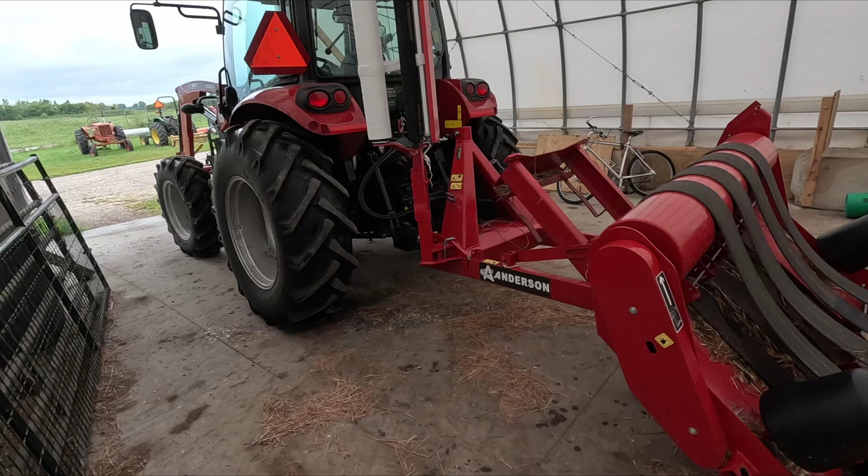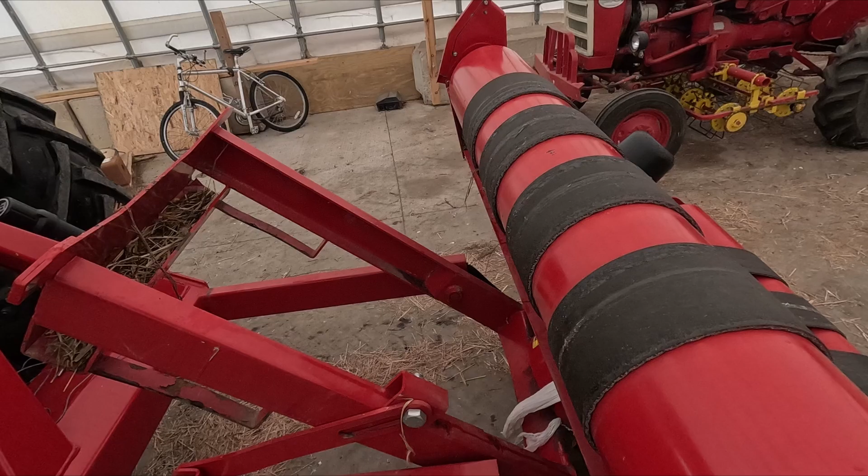For those of you who haven't seen one of these working like this before, this would be the dump position. You lift up on the 3-point and this frame lifts up, and on this pivot point here, the deck flops back and your finished bale rolls off.

Basically, the fundamental idea of turning this into an automated system is to alleviate the need for a big enough tractor. For example, sitting out there is a John Deere 5210. It's a great little tractor, and it runs the wrapper perfect. But that machine doesn't have four-wheel drive, doesn't have a loader, doesn't have front weights.

When you pick this up, this whole contraption weighs 1,300 pounds. It picks up the front tires of the tractor, and just driving around here on the farm, it's not too bad. You can steer with your brakes if the wheels are starting to fully come off, but you definitely couldn't go down the road with it like that.

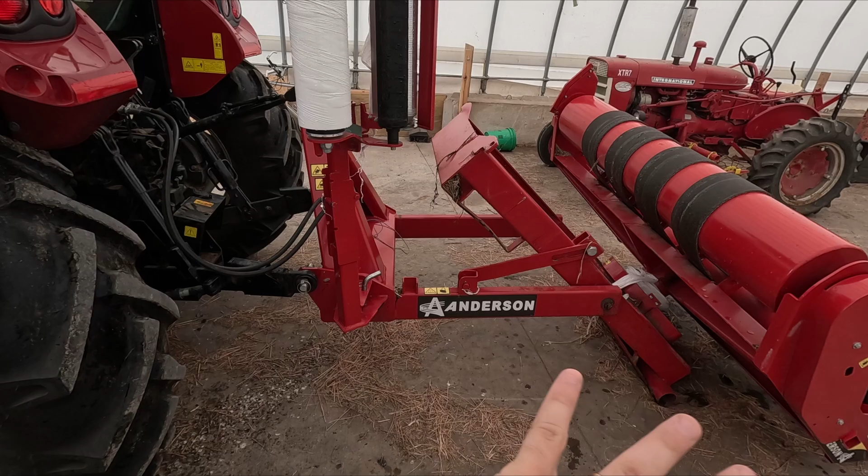By converting this into an automated system and having some sort of stand or trailer underneath of it, the idea is then that any tractor could pull it. This little 140 could pull it, the skid steer could pull it out to where it needs to be, you could pull it behind a pickup truck, doesn't matter.

It'll have its own power plant, its own gas engine running a hydraulic pump that'll run all the functions of it. So it doesn't need to be connected to anything else, just needs fuel stuck in the gas tank.

I've been sort of torn between the idea of doing a fixed stand where you would still pick it up and move it with the 3-point.

Generally what's going to happen, I'm making some assumptions here, but generally what would happen is I would finish baling, come back to the farm, drop off the baler, grab the wrapper here, hook it onto the tractor, put the bale grapples on, grab a bunch of plastic like you see sitting there, and go out to the field and wrap.

Or we would maybe haul hay back, and it would just be sitting stationary here at the farm, and as I was unloading the wagons, I'd be running it through the wrapper and stacking it.

But the thought that I had with the stand is that I always still need this tractor to move it around. What if I've got a neighbor that just put up some hay and wants to rent the wrapper for the day or the afternoon or whatever? I still have to take the whole tractor over there just to drop it off, because maybe they've got their own setup and they don't need the tractor.

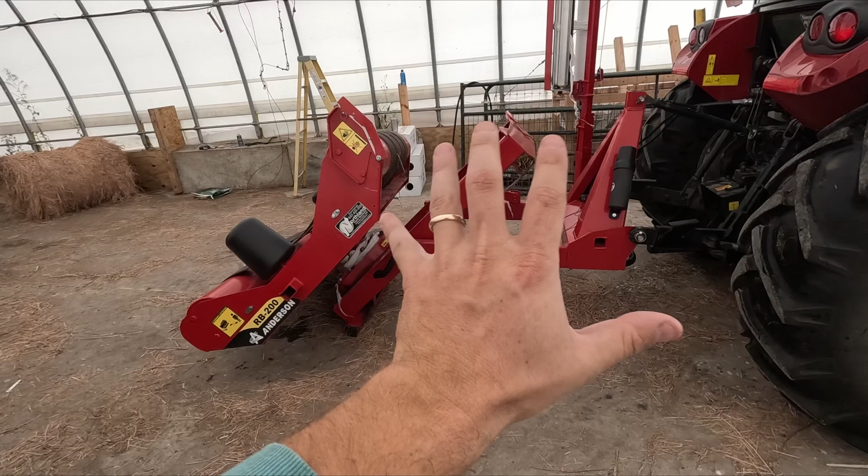So there's potentially a big time saving factor by having this as a trailer and not as a stand.

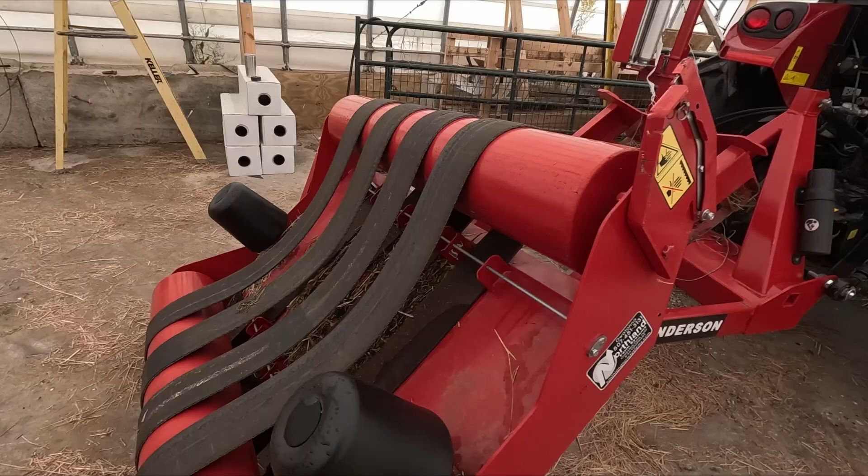Funny enough, I was actually planning to turn this into a trailer like 2 years ago, just so we could run it behind that John Deere that's sitting out there. So I had kind of collected some of the basic pieces that I needed to do it.

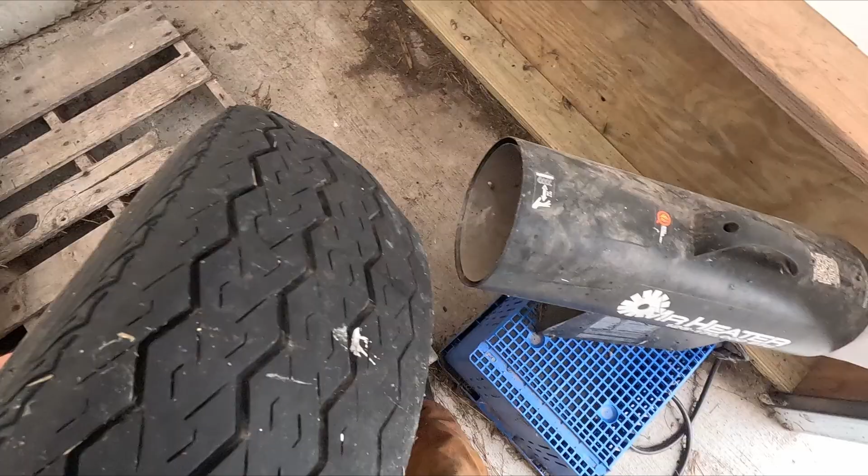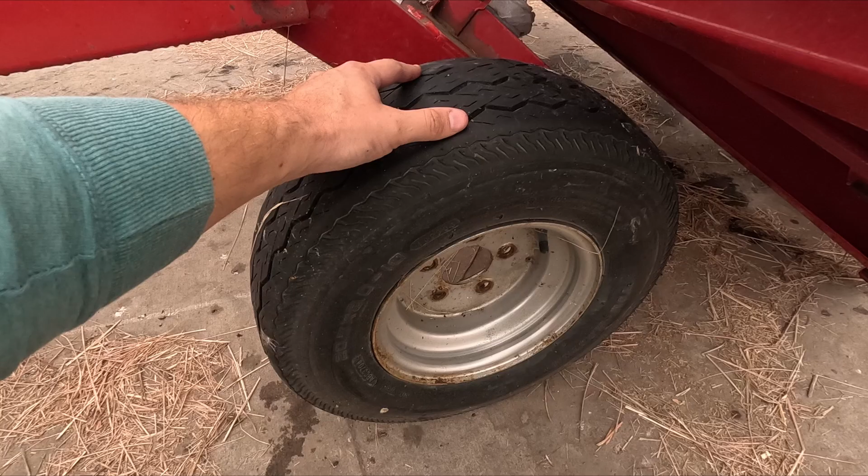I grabbed the tire here. What I found was a set of these old tires, the other one's in my pickup. And these I bought, they're not particularly good tires, but the idea was that these are a pretty good size, and they got the right weight rating for moving, if this was trailerized, moving this contraption.

So what I have in mind here is that there'd be a tire on either side, sitting just about there.

So far enough out that it clears the drop portion of the deck, far enough forward that it clears the deck there, but far enough back that when the safety lock is engaged and there's going to be a hydraulic cylinder to control the tilt deck, when that's sucked in all the way, that this is far enough back that it doesn't still want to tip backwards.

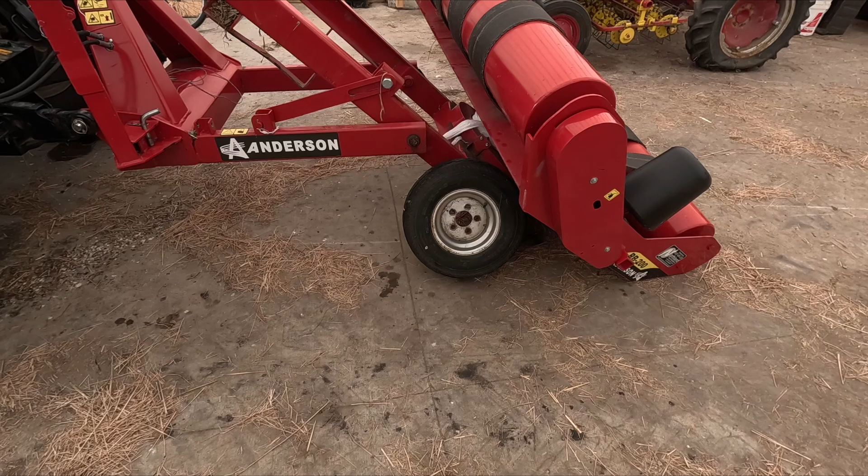We're pretty close to that edge. I don't have a great way of testing the balance, the tipping point of all of this. I kind of have to just build it and find out. But I'm reasonably confident that that location for that tire will work.

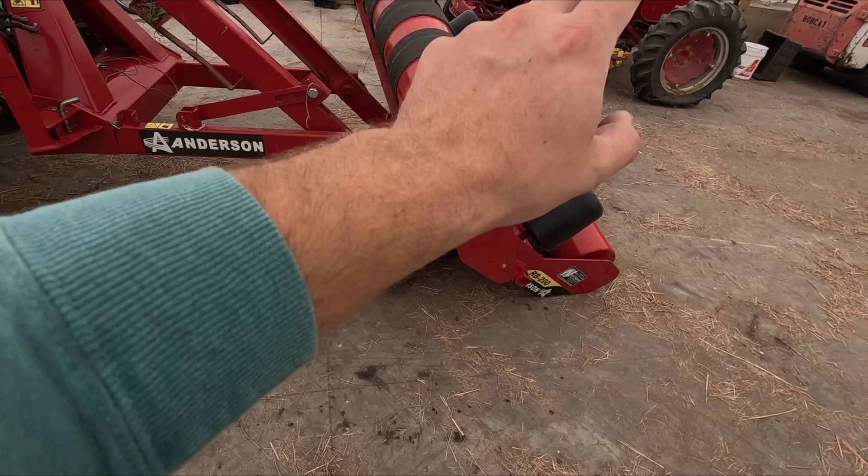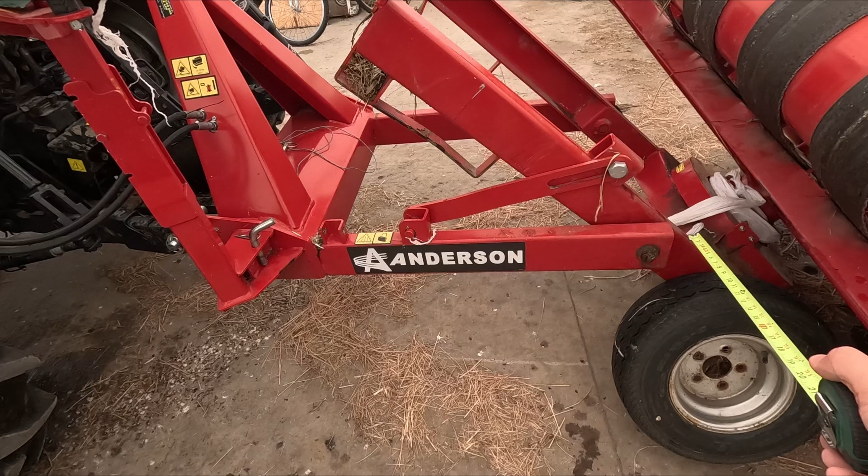I might go grab the stand so I can jack this up to double check all the geometry, but that's the general principle. The thing we have to figure out now is how much steel we need to connect this. So underneath of this is a 2x4 square tube. We're gonna go with a 2x3 by 1/4 inch wall subframe.

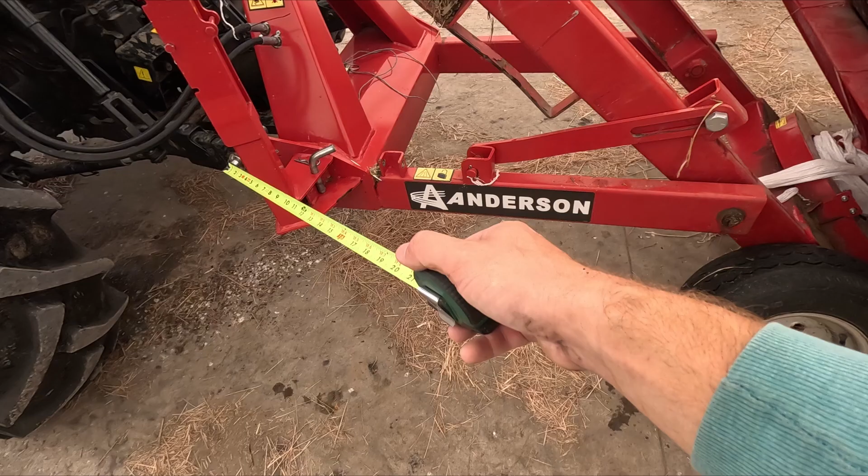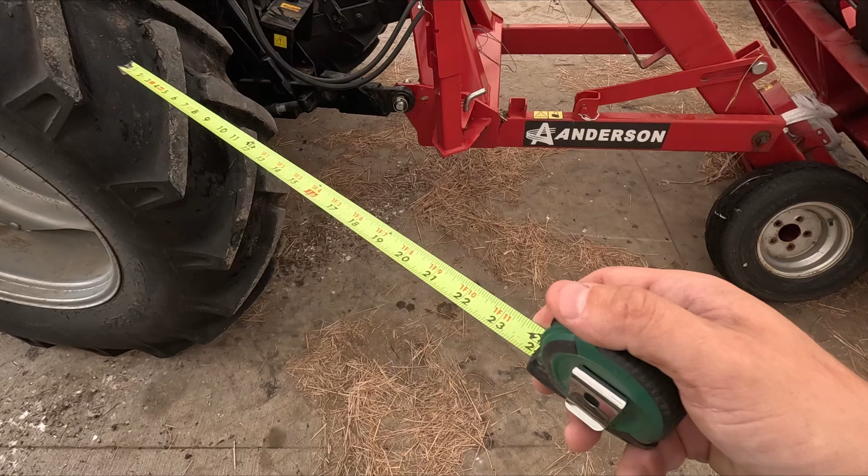It's gonna sit directly underneath of this, running up forward, coming forward a certain amount, enough room for the power unit and everything to sit right here, and then continue forward to a tongue for connecting to the trailer, or connecting to a tractor, a pickup, or whatever.

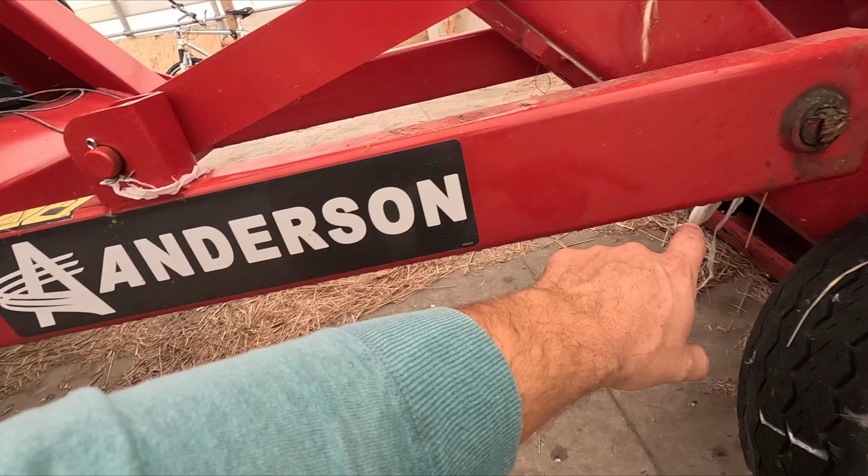So there'll be at least one cross brace that's going to be underneath. It can't be, well, it'll run, if the square tube is sitting right here, it'll run straight across there or somewhere back here maybe. I don't know exactly where. Those are just going to be scrap pieces. Those won't be the same 2x3 because they don't need to be. They're just tying everything together so it can't walk around out the back.

This will be a 2x3 piece with a hole drilled in it big enough for the axle stub. I just bought these generic spindles that'll slide through and they'll get welded in, and then the hub face will mount the tire right about there.

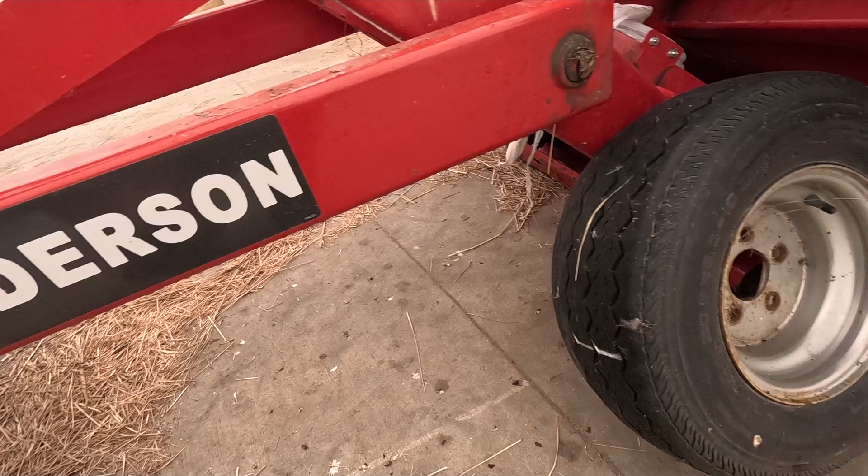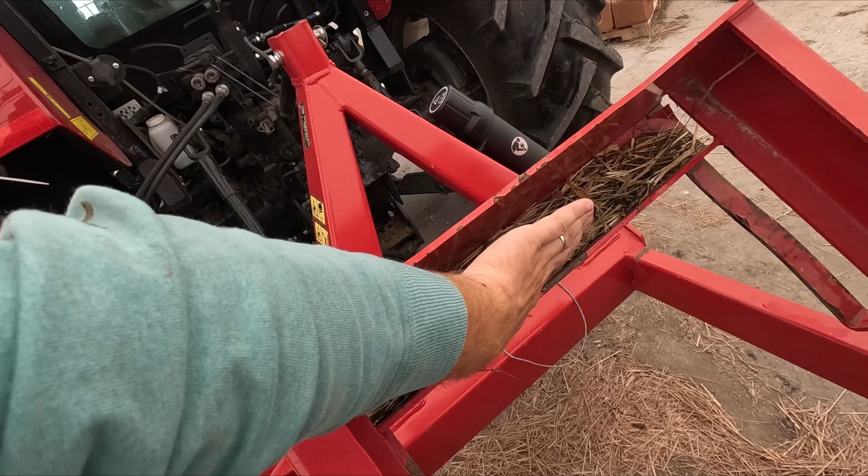Yeah, I'm trying to think of what else goes into this. There is the hydraulic assembly that's going to have to get added to this. The way that that's going to work, I've already figured out, is there's going to be a plate that sits right here, and it's going to be through bolted to this.

And a big important part of this process for me is that I want to be able to turn this thing back into a 3-point wrapper at any point, super easily. My big thing is if we upgrade wrappers at some point, if I can't sell this as an automated system, I just want to be able to revert it back to an Anderson RB200 and go trade it off to the dealer.

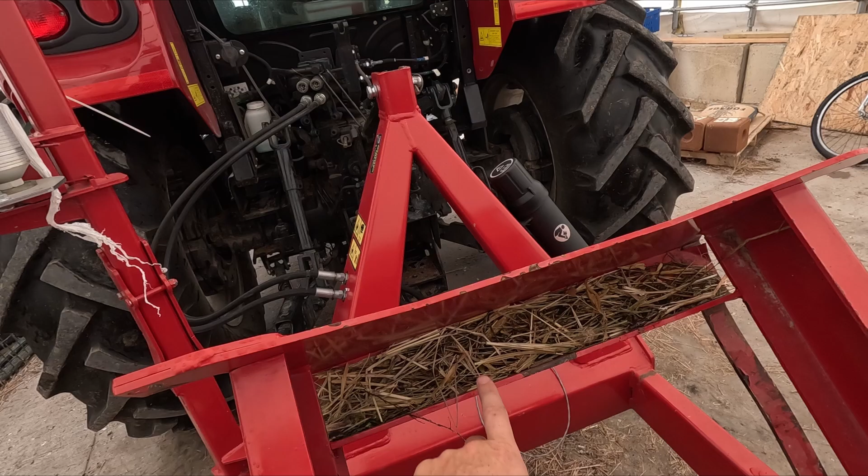So a lot of the modifications, I want to minimize how much welding I have to do on the physical machine. So these ones are going to be through holes, and then there's going to be a tab, 2 tabs that come out where a pin will slide through and the hydraulic cylinder will grab onto that.

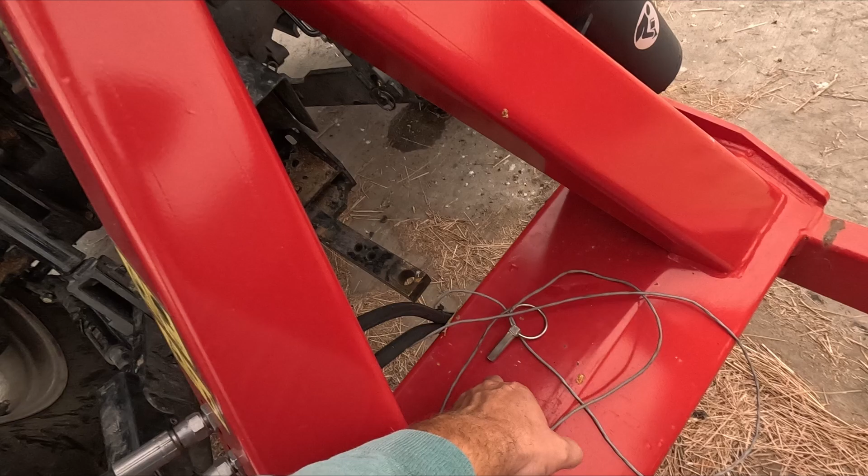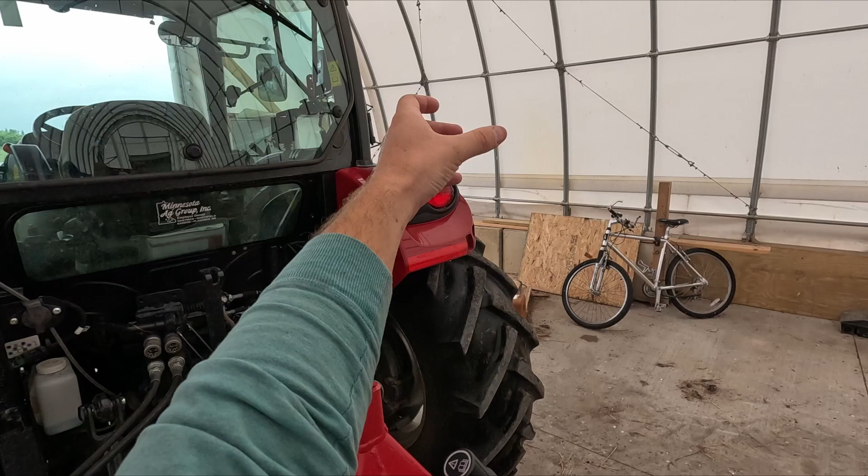On this side, this is a little bit harder. I think this may end up getting welded on a plate with actually a 2-inch receiver for making your own hitch in a pickup truck. That would then just have a pin that goes through it and a big 2-inch stock piece that's going to come up and out, and at the top of that another 2 tabs that the top of the hydraulic cylinder will connect to back down to here.

So you could still run it just with the tractor and use the tractor hydraulics to cycle it, or you could just pop that cylinder off, use it as a regular 3-point wrapper. But when it's in its trailer configuration, then yeah, you'd have a power plant with it.

I'll be able to test all of the trailer function and the dump function just using the tractor hydraulics before I have to build the power plant unit to run all of this. So the things I'm going to figure out right now so that I can go back and start plugging some of this into SketchUp and figure out exactly how much steel I need is I need to know the length of the frame here, which I'm actually going to measure on the...

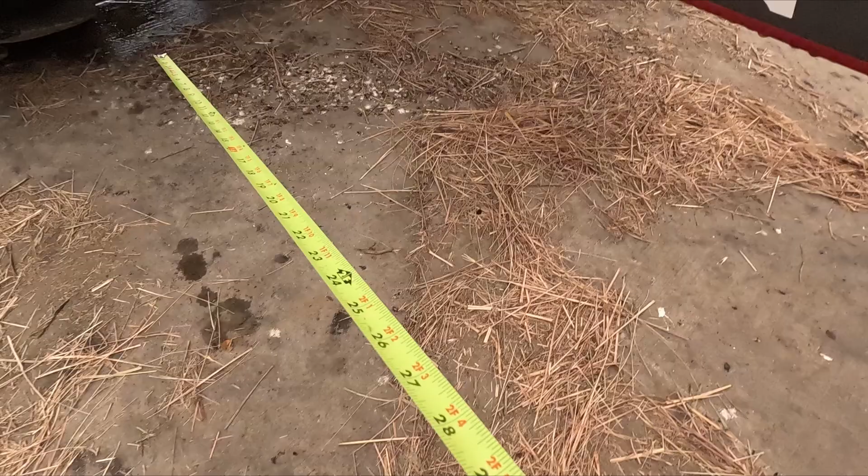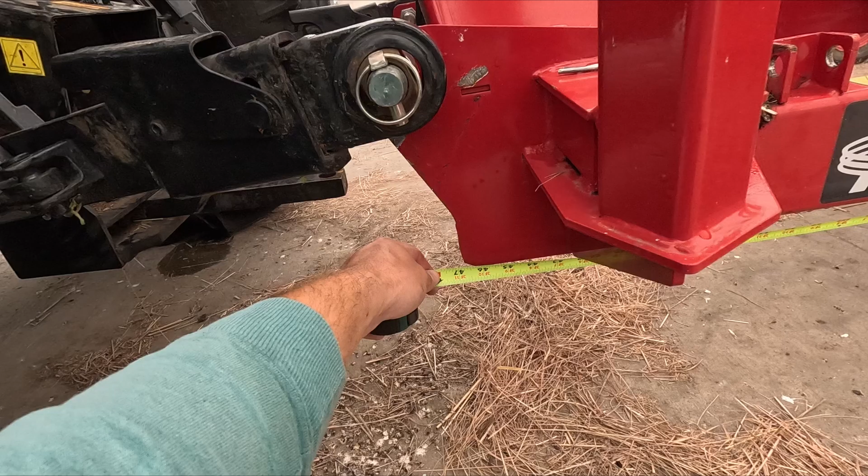No, measure on this side, but switch hands. I'm going to grab from the back of that to the front of the frame here, which is 47 inches just about. If we come all the way forward, the center line of that pin looks to be just about 4 foot.

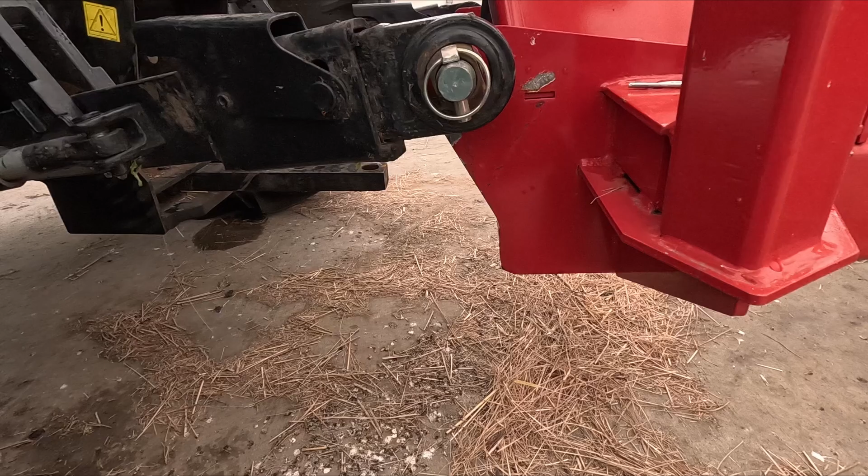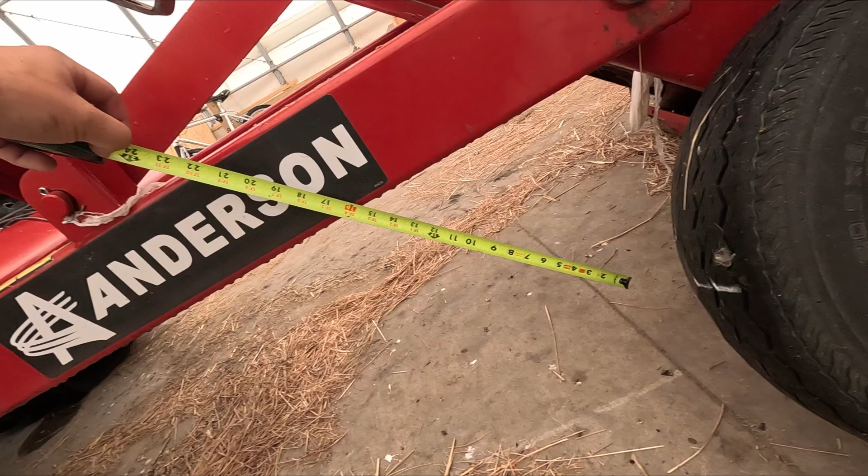This portion, which is much harder to gauge how long it needs to be, looks to be about 16 inches. Yeah, because that would be 16 inches right there, depending on the angle that it's cut at. But 16 inches would probably be pretty comfortable, especially because the frame is actually lower. But if I account for 16 inches, then I won't be cut short.

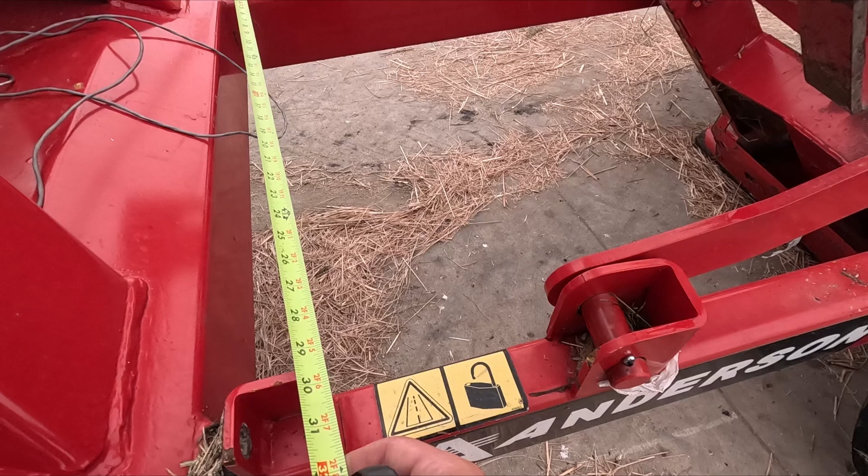This front portion is more of a made-up number. I guess we need the outside-to-outside measurement of this frame. It's kind of hard to get the cylinder to grab the tape measure and stay put. We're at 30 3/4.

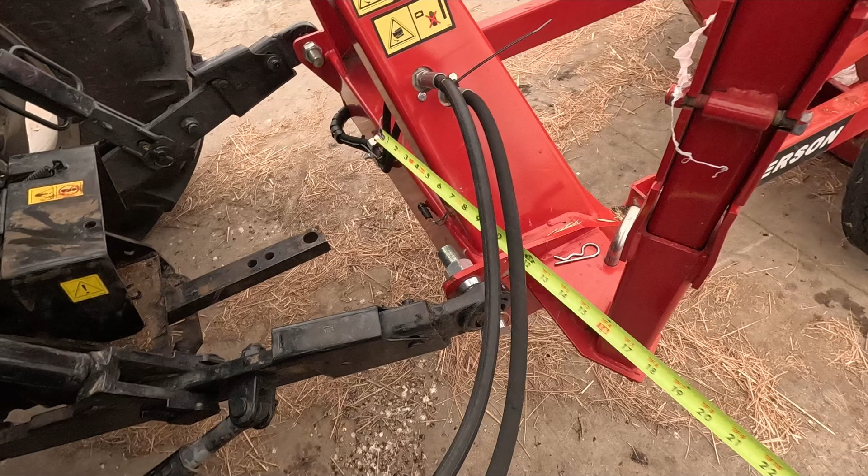So that's what the cross brace pieces would be. There probably needs to be one towards the back, and I think one right underneath where these 3-point connections are, because these are part of what will hold the assembly down. I'll make or weld tabs that come from the bottom plate up to these hole positions, and then I'll bolt through them, and that'll hold the front down.

The back, I'm not quite sure what I'm gonna do. I might just drill and tap a couple holes here in the back, so that I can have a tab that comes up from the trailer underneath and overlaps and then gets bolted through.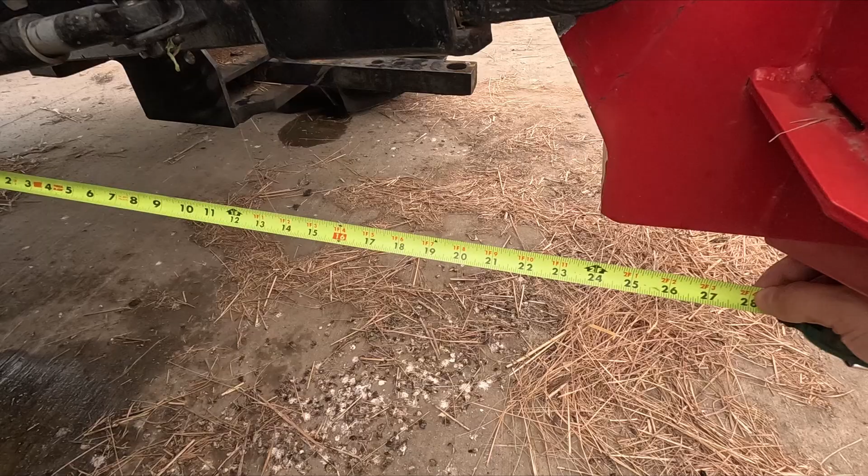This front portion where the power plant and everything is gonna sit, it'd be nice if that was probably 2 foot. The more trailer there is forward of this, the more weight there is to balance the deck. Because a big concern I have is that maybe this thing is really well balanced and rides really good, but when you put a bale up on the deck, it just flops backwards. That's something I don't want.

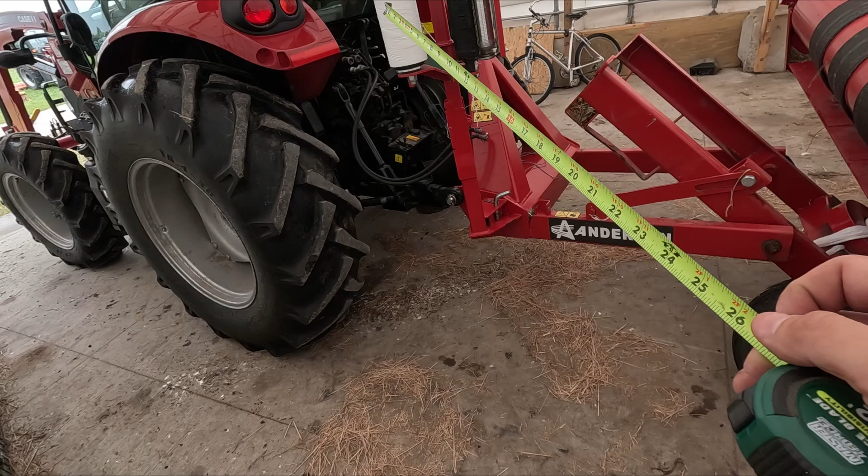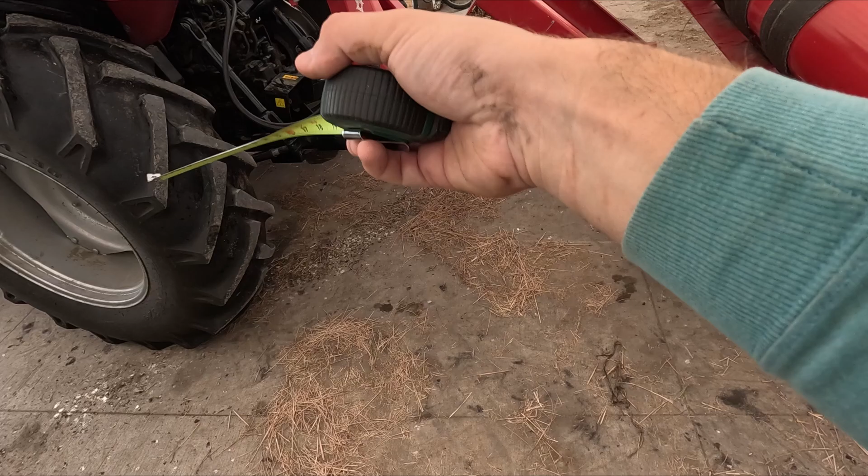If it's hooked up to a truck or a tractor, the tongue would stop it from going too far. But it would be nice to pull this into the field without being hooked up to anything and just have it sitting out in the middle - with the back weight on those tires, and a good jack or two in the front to keep everything stable.

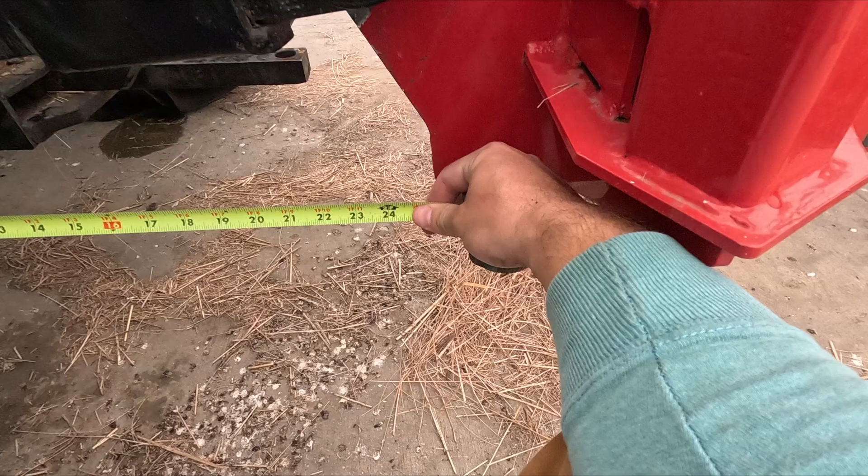So it's a bit of an experiment, but we'll say we're gonna come 2 feet forward from there, so the deck portion of these would be 6 foot.

And then I have to decide - I don't know how to draw this out, but if the tongue comes together at a single point with 2 triangulated beams, or if it's just a single bar that comes back and is welded to the face and then braced. I know it would definitely be stronger to do a triangulated design. Some of the question will be how much material I have left.

If I buy, say, a 20-foot stick, I'll have to sit down and do the math. If I have enough for a triangulated system, that would be preferred. But if I've got to skimp a little, that's fine.

If this was a tongue, that would be perfect if it was 2 foot from the front. They do say if you're pulling a big trailer behind a pickup, 3 foot would be standard for a regular half-ton, three-quarter-ton pickup truck. If you're pulling behind an RV or something extra wide, like a big dually, they say a 4-foot tongue from the front of the obstruction to the hitch point is generally what you want to go for.

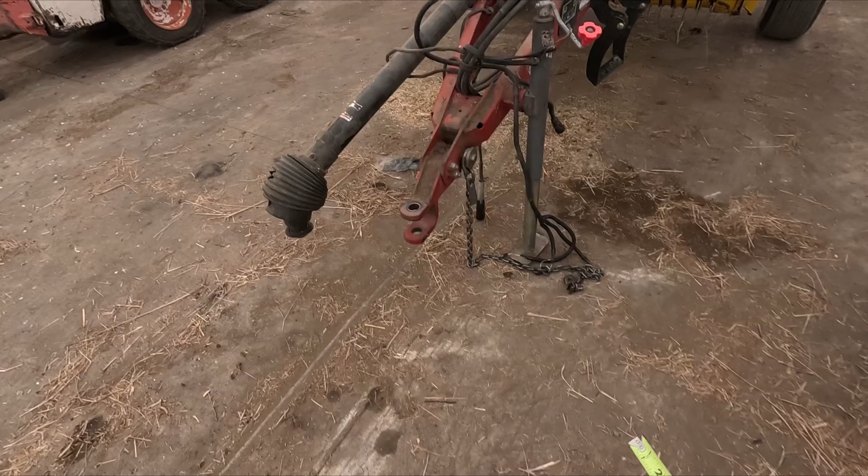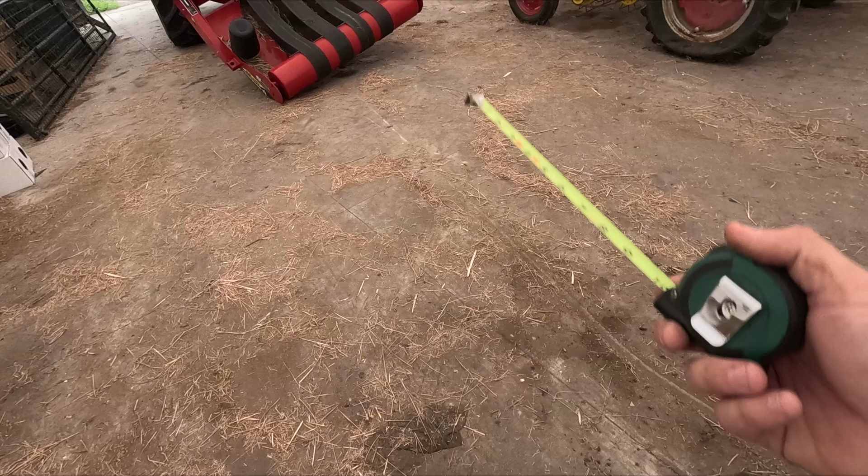In a perfect world, we would do something like an adjustable, agricultural-style pin connection rather than a pintle or anything else, because most of the time this thing's probably going to be getting pulled behind a tractor. So that's sort of the general gist of what I'm trying to do here, how I want to set this up.

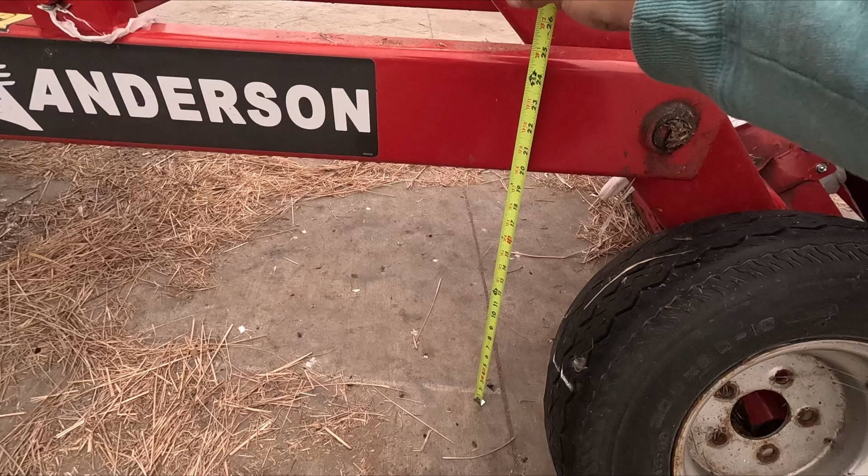I do need to reference the height here so that I know. We're probably just about 20 inches off the ground. So we'll assume that is a good height.

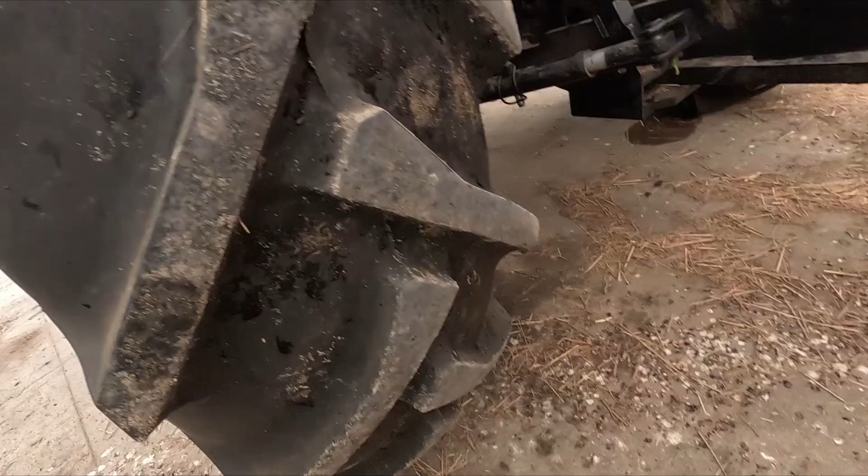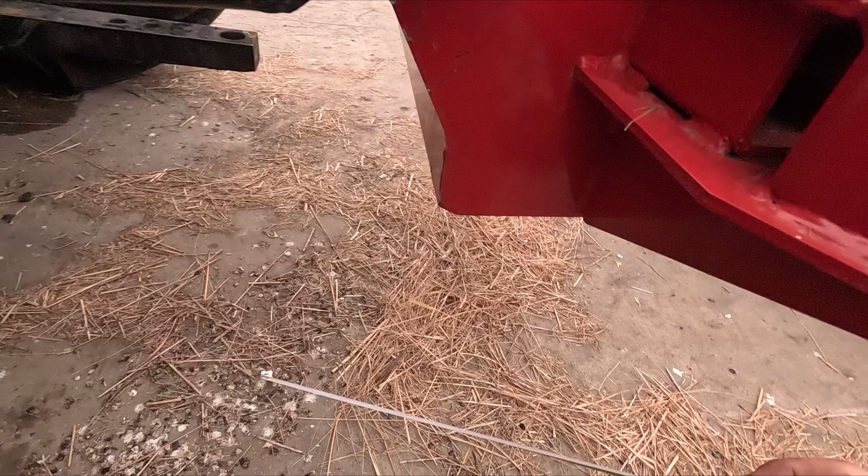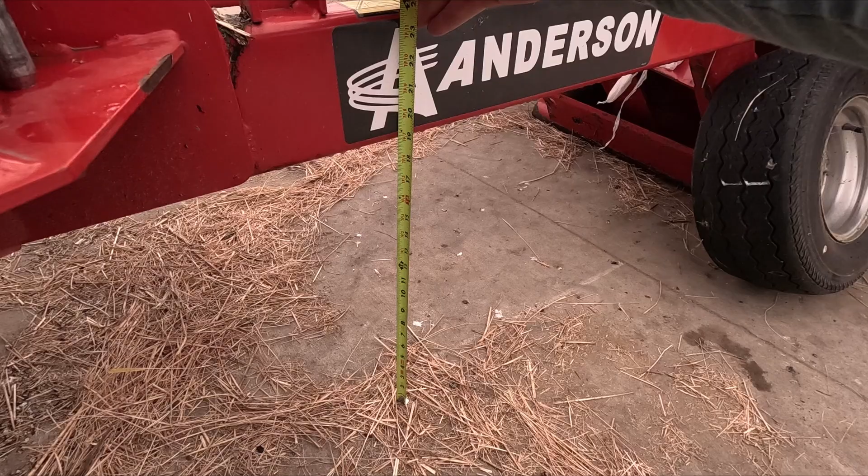Which actually would work out perfect - the hitch height for this tractor is centered right at 17 inches. If this was 20 inches up and we had a 2x3 frame underneath, that would put the hitch height dead at 17 inches. So this thing would be pretty well balanced when it was getting pulled behind this tractor - it wouldn't be too far forward or too far back.

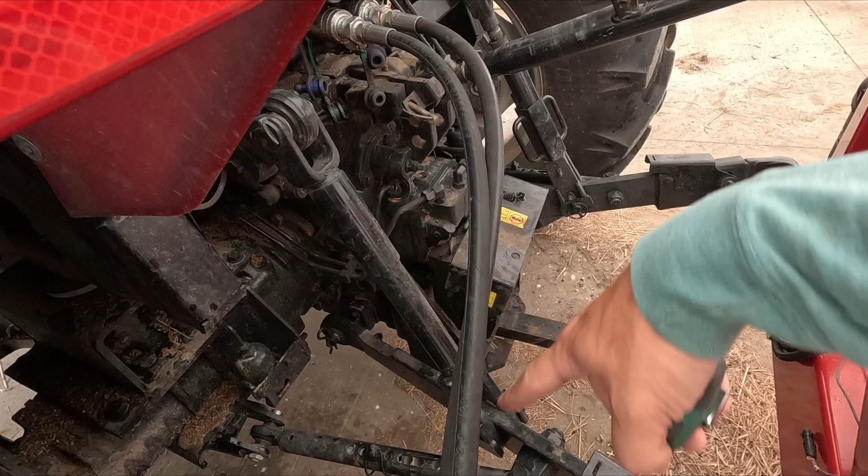This does generally need to be pretty level when you're operating it, so having the tongue height be adjustable is actually important. But if it's got a good quality jack, or maybe 2 jacks, that wouldn't be the end of the world. I could put one at the front of the frame on both sides, which would help get this thing level in the field, both front to back and side to side. So maybe that's what I'll plan to do.

And then I have the frame just come straight forward to be at the hitch height to match this tractor. My pickup truck has got an adjustable hitch for going up and down, so I don't generally need to worry about the height for it on there.

I think this gives me enough information to jump into SketchUp and make a quick basic model of what this is going to look like, all drawn up, and from there I can calculate how much steel I need, and I can jump online and get some ordered.

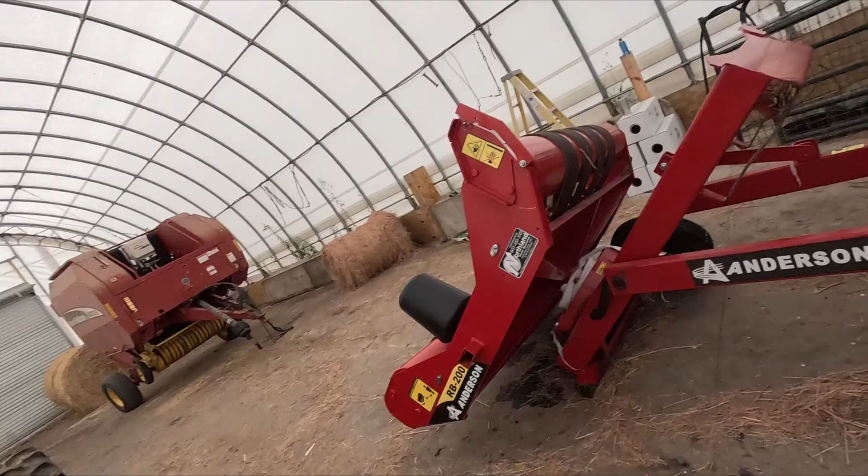All right, so I just wanted to show you before the end of this video what the frame looks like. I know talking about it, it's sometimes hard to track on the reality of it. I can see it in my brain, you guys can't. So this is it in SketchUp.

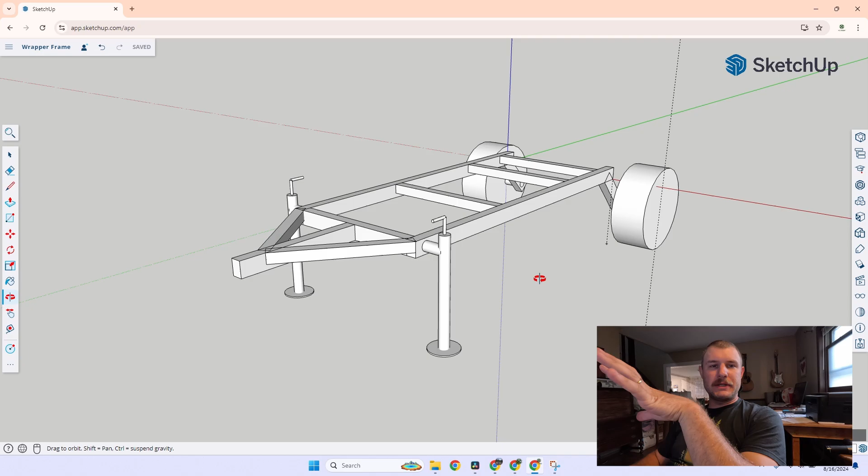Might still do a little bit of tweaking, but this is generally the layout that I'm doing. I'm trying to keep the total steel purchase for the 2x3 tubing to under 20 feet, because that's what the closest person I can buy it from at a good price. That's the length they sell it in, 240 inches.

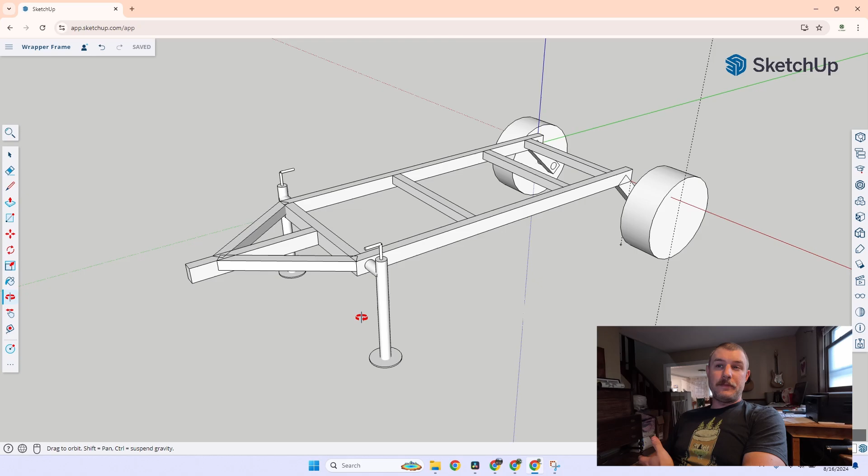So there's a couple of things in here that I think I would do. I know in the other video section I said the cross braces wouldn't be 2x3. I think the front one does need to be 2x3. And I would prefer the back one to also be 2x3, but that tips me over the edge, that put me at 21.25 feet. You need a couple inches for the cuts and all that stuff, so couldn't quite make that work.

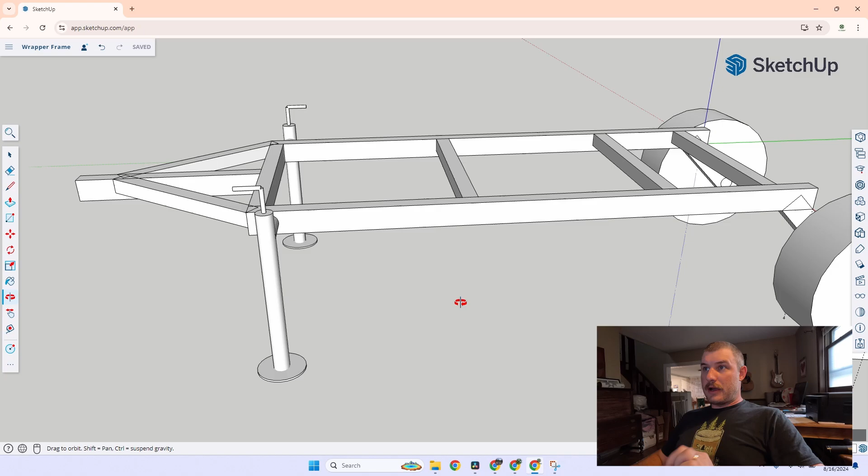If I can find a 24-foot stick, that'll sort of change the math here. But what I have in fundamentals is two 6-foot main beams that run down either side. I have some heavy wall 2x2 square tubing here in the shop already that I can use for cross braces. There's one at the front.

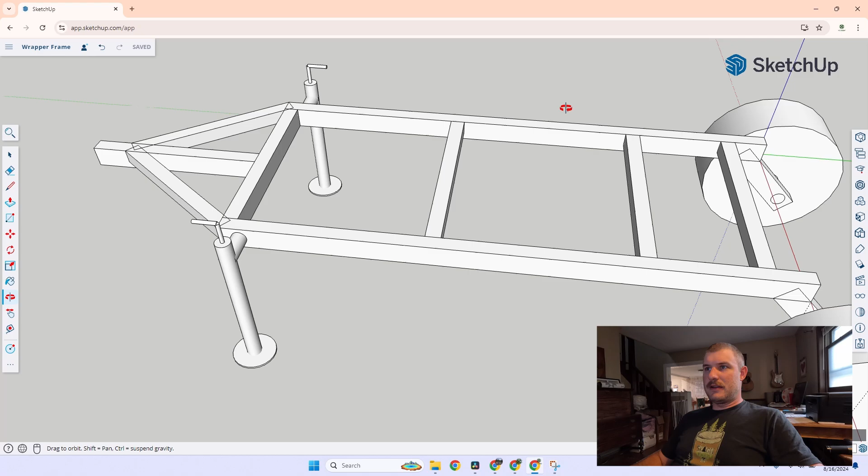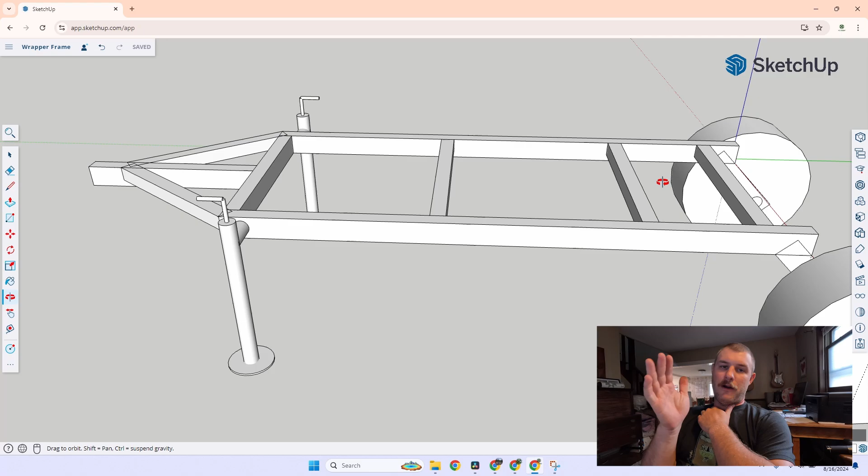The wrapper will sit on this back portion. There will be one as far back as I can physically go without interfering with the tilt function, and then one as far forward as I can go. There's these hoops for picking up the wrapper with pallet forks or something, and they kind of sit towards the front of the deck, so as far forward as I can go without interfering with those.

The front cross member will be a 2x2 or a 2x3, and then the main tongue stem will be 2x3, with some diagonal bracing to help support the whole thing.

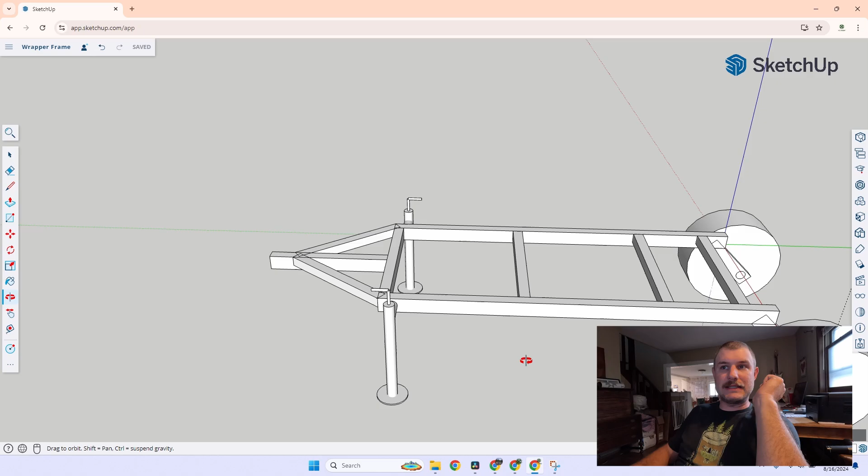This trailer is physically longer than it needs to be, but I'm still worried about the tipping point, the leverage point of that deck, especially once it's got a bale on it, or like a big heavy 1,200 pound, 1,300 pound baleage bale. So the thought by making it longer, I'm just adding more weight to the front to counteract that.

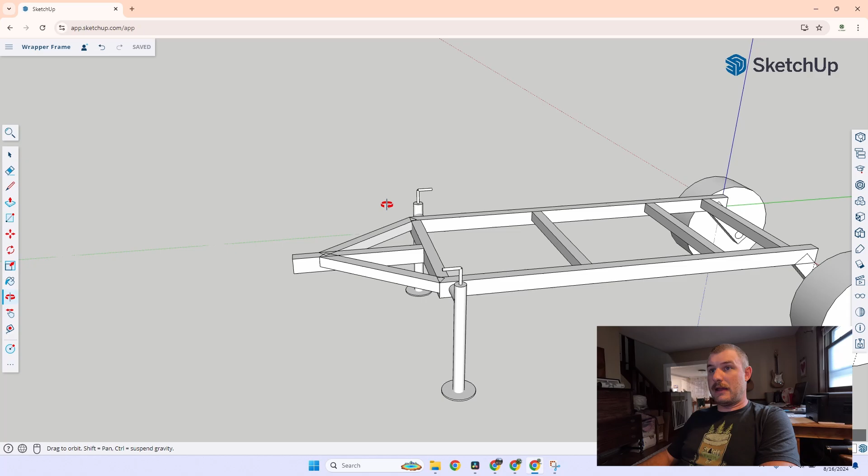And having this additional space in the front, if I need to, I can actually install a weight rack, like a suitcase weight rack, off the front of a tractor to add additional ballast to keep this front heavy enough, or to balance the tongue weight as best I can.

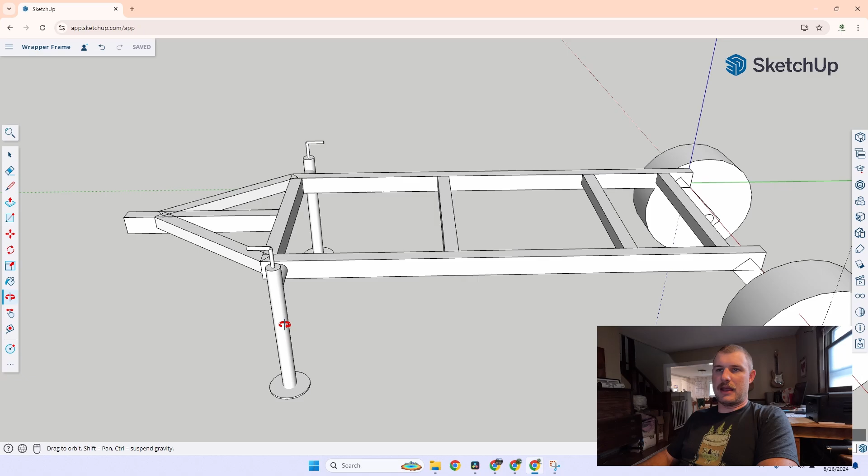I have this spec'd out with 2 jacks on either side. These are just my quick... made some jacks in SketchUp so I could physically see where they would go. They're not exactly lined up, they would just go somewhere up here. They'd probably actually be a little bit farther back so that when the jack is rotated up in its transport position, the handle is well past this back corner.

Yeah, the braces will be 2x2 for the front here. The tires that I have for it are 20.5 by 8. I have to double check that the spindles that I got are big enough. The tires that are on those are just 1,100 pound.

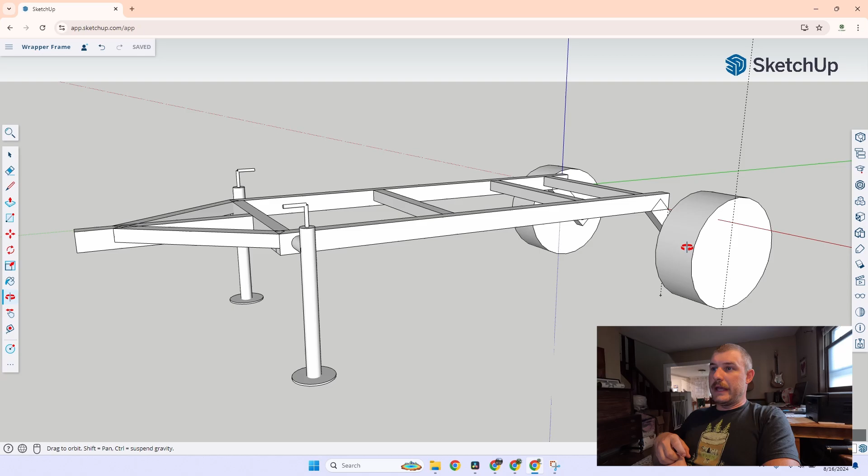I can get 1,500 pound rated tires, so if and when I build this and it all works out, I'll order a new set of rims and tires for it that are at a higher weight rating.

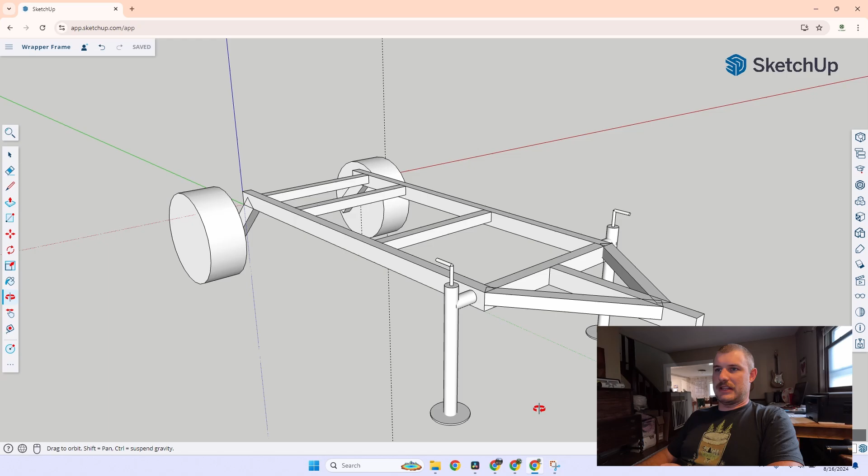Yeah, that is the SketchUp version. If you're not familiar with SketchUp, it's not great for modeling mechanical equipment. You can't do moving pieces or anything in it, but for general layout, trying to figure out the spacing of stuff, it works really well, and it's really easy to use. It's free to use, the SketchUp online, so I do recommend it if you're just trying to play around a little bit with 3D digital modeling.